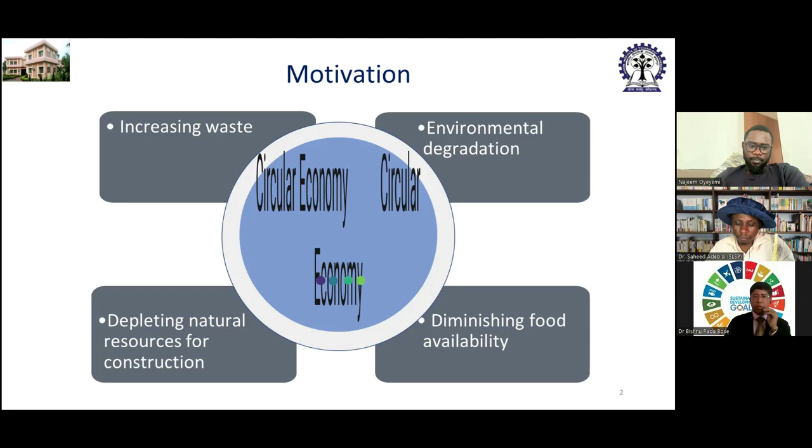This is the present scenario: carrying capacity of the biosphere has overshot by a huge margin. That means nature has lost its regenerative capacity. This is the theoretical graph - it is a tremendous critical situation for us. So recycling can reduce waste and replenish resources, thereby reducing burden on nature and increasing sustainability.

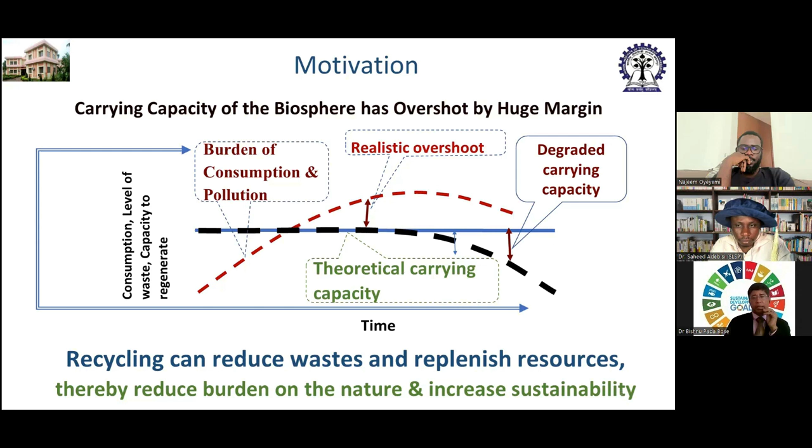These are four thoughts I had in my process: sand is a natural resource that's already depleted. Clay used for fired clay brick is not environment friendly, and it's also an illegal process because it reduces agriculture capacity, crop capacity, and land area. At the same time, stone chips also have scarcity, and available land for cultivation is shrinking due to the disposal of waste.

So these are the four elements I considered in the concept generation process. Sand mining has been restricted in India and other countries. Use of natural clay for fired clay brick is also being banned. Stone chip quarries are precariously exhausting. Land for productive use is reducing.

This is the future projection showing the rate of generation of waste - exponential growth of waste generation, which is very harmful for the earth. The solution is needed immediately.

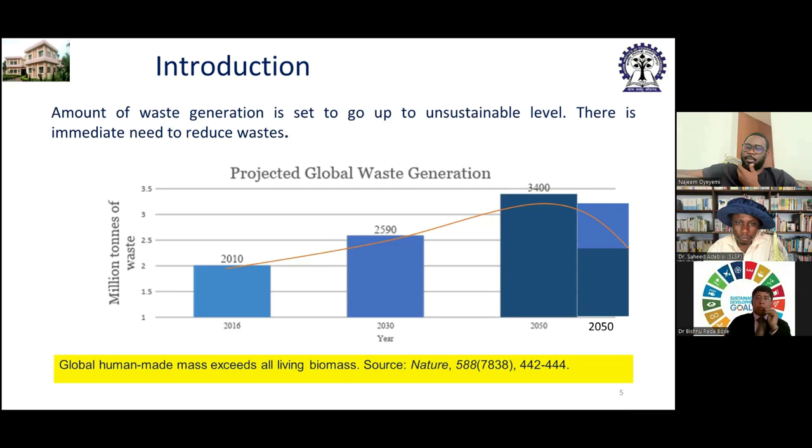My process was actually involved with mining waste. Globally, 31 billion tons of waste is generated annually from coal mines. Coal mining alone degrades 34,500 hectares of land every year. So this is a huge loss for all of us, and it's reducing the sustainability of natural resources.

The concept is that generation of a colossal amount of dangerous waste is an inherent part of mining activity. Mining activity is presently not so sustainable. At the same time, natural sources of construction material are fast depleting. Clay bricks deplete fertile topsoil, challenging food security, and are being banned across the world. Construction work is not sustainable unless an alternative source is found.

Waste contains heavy metals that pollute land, soil, water, etc., and it is unsuitable for humans also. Using waste to replace natural materials for construction work can sustain these two activities - this is the core concept.

Global man-made mass exceeded all living biomass, a landmark reached in 2020. It is pertinent to aim for a world without trash. The vision for a circular economy, where we use resources sparingly and recycle endlessly, is inspiring business and environmentalists alike.

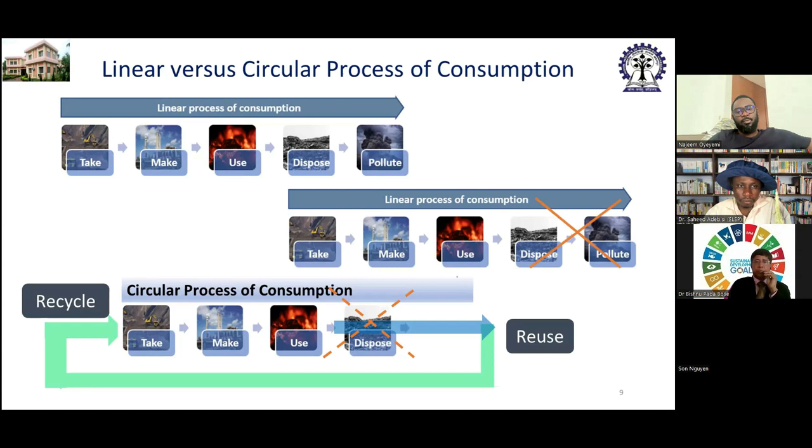Since my project is related to bricks and concrete, I have presented some negative impacts of burnt clay brick, because my production is not burnt in my brick processing - we are not using any fuel or fossil fuel. So that's what I mentioned: negative impact of the burnt clay brick, which exists in many countries.

Kilns of burnt clay bricks releases over 1070 million tons of carbon dioxide emissions into the atmosphere every year, which is 2.7% of total emissions. Globally, brick kilns burn 375,000,000 tons of coal per year.

Process of burnt clay bricks are heated up to a maturing temperature between 900 to 1200 degrees Celsius. In this process, pollutants released are particulate matter as well as greenhouse gases.

The process of burnt clay brick releases 0.41 kg of carbon dioxide per brick. There is a huge amount of carbon dioxide generated every day throughout the globe. Manufacturing of clay bricks causes substantial amounts of emissions.

Use of waste industrial byproducts in cementitious bricks can reduce the release of greenhouse gases and embodied energy of the brickworks. Bricks from waste material without a heating process can reduce a massive amount of greenhouse gases.

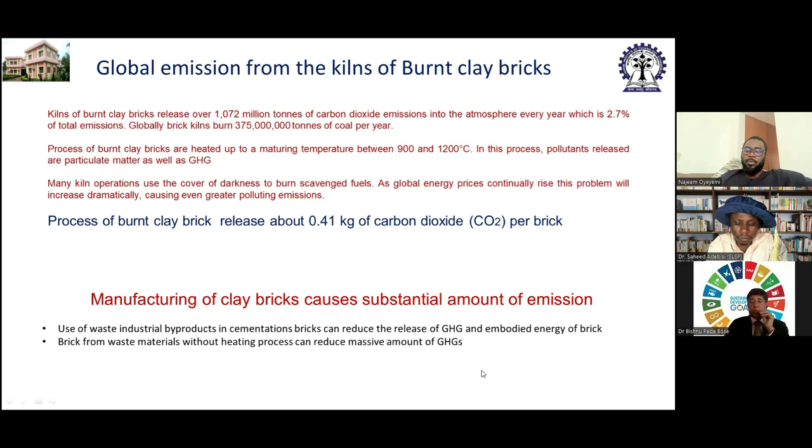Basis for selection of specific waste. This is the concept and thought behind why I selected mining waste: to identify solid waste material that is environmentally harmful, available in large quantities, can be recycled in civil engineering applications, can potentially replace depleting natural construction material, and whose disposal requires a lot of land area.

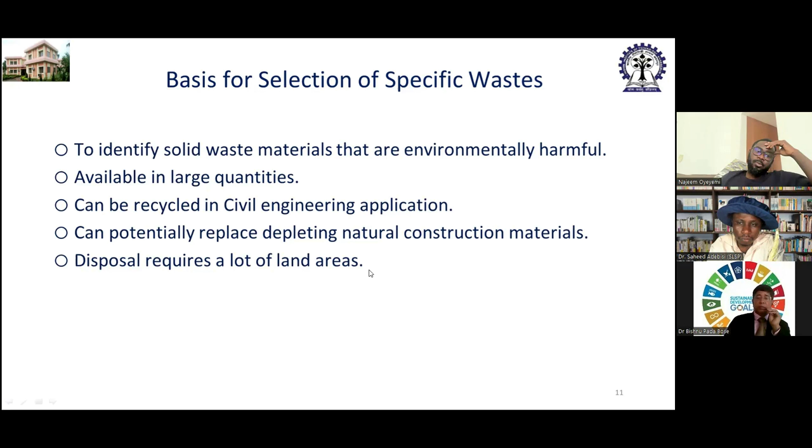On this basis, I selected mining waste because it satisfies all these conditions: mining waste pollutes the environment, is available in large quantities in the country, can be recycled in civil engineering applications, can potentially replace natural construction material, and disposal requires a lot of land area. This is how mining waste pollutes our environment, damaging biodiversity and causing calamities.

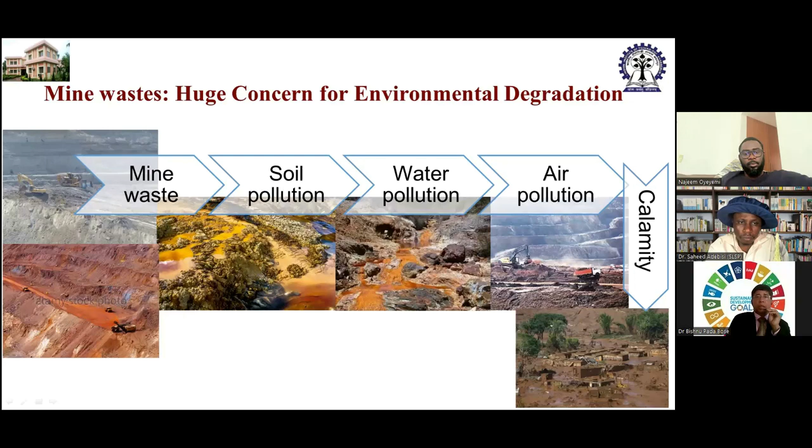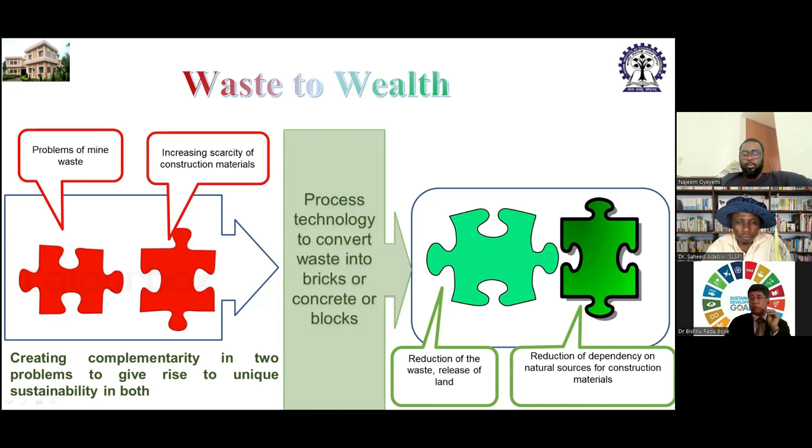Process technology to convert waste into brick, concrete, or blocks. Now it is the product: reduction of waste, release of land, reduction of dependency on natural resources and natural sources of construction material. In view of the above, I aim to develop process technology to utilize waste material as much as possible.

This is the mining waste which I considered to develop this material. It is the actual image of mining waste. This is the overburden material, which I showed in the graphical representation — 20 to 30 meters of overburden material that is actually mining waste, and below that the coal seam is there.

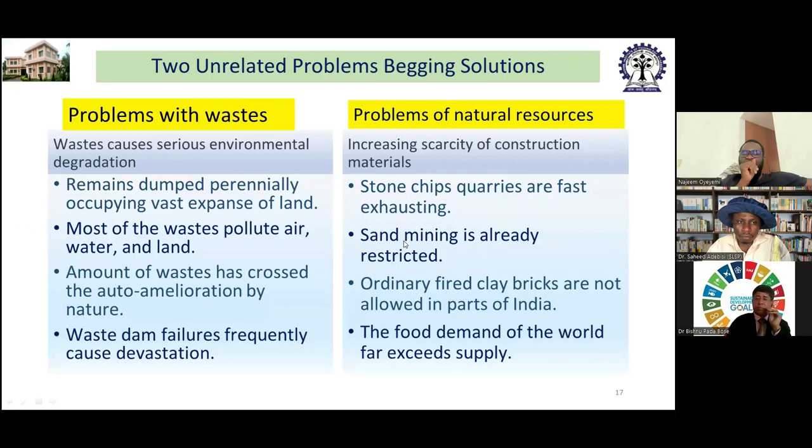Problem with waste, problem of natural resources: waste causes serious environmental degradation and increasing scarcity of construction material. This is the same thing I explained in the last slide — a multidimensional problem requiring a single solution for all problems. There is a multidimensional problem existing in mining waste, so I developed this technology which can eliminate all these problems.

Mining waste occupies a huge land area, and using all this material means naturally fertile topsoil isn't needed, unlike for burnt clay bricks. In my process, there is no heating process, no fertile topsoil required — it is actually waste material. I considered these things in my concept and finally developed this.

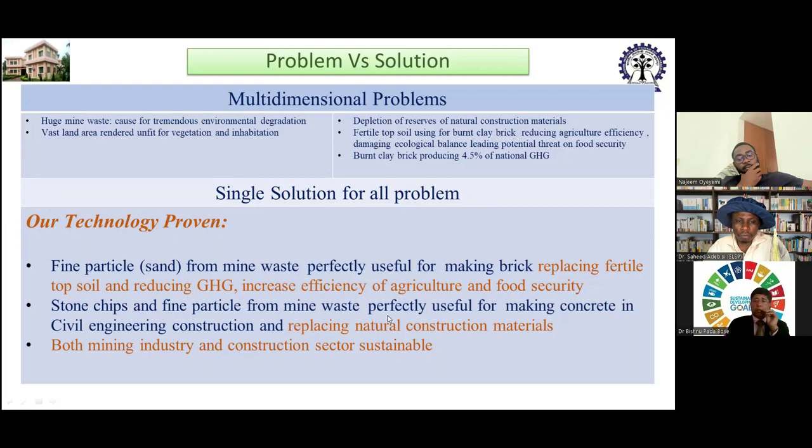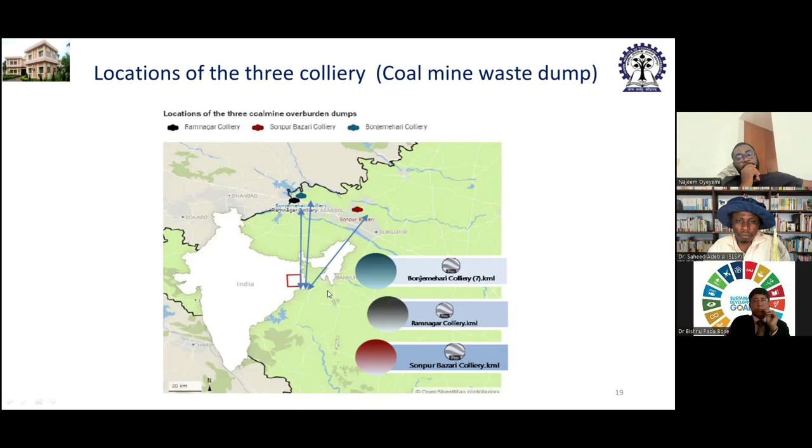This is the original location where the problem existed in the mining waste, shown with actual Google Maps imagery. This is the waste, a huge amount of waste. This is the original picture of the mining waste, with stone and rocky material available there.

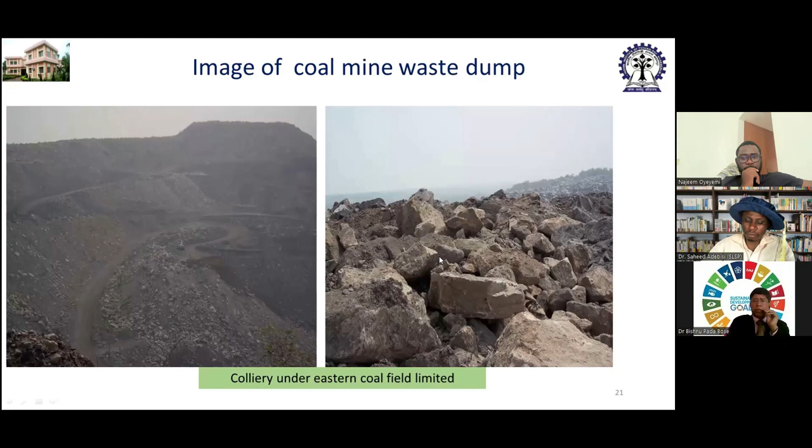Coal mine waste releases heavy metal leachate, causing serious damage to the ecosystem. Maintenance of the dump is costly, and failure can cause facility damage. Rainwater washes the waste to far away land, rendering it unfertile.

This is the circular economy concept I developed in my process: first screening the material, then concrete and brick mortar, then construction, then new life of the waste materials, then end of the buildings, then demolition of waste, and again the process. This is the circular economy concept.

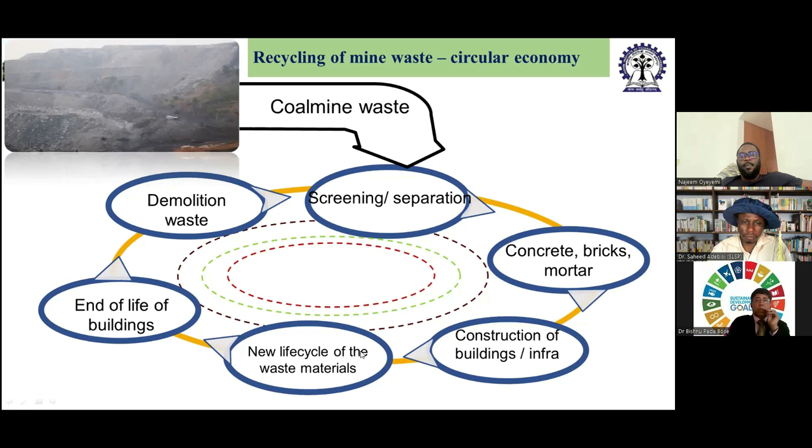Core driver of the project: to develop a process that is environmentally friendly, that can lead to consumption of bulk waste materials, partially replenish the precariously depleting natural materials, and release land for agriculture and economic activities. Benefits from the project include reducing dependency on fossil fuel, reducing emissions, replenishing natural resources, increasing land area, reducing pollution, material circulation, reducing maintenance cost of the waste dump, economic development, social development, and job creation.

This is the flow chart. First, the problem: mine spoil causes serious environmental problems. Problem two: conventional sources of aggregate are depleting — state of the art. Then I developed the concept.

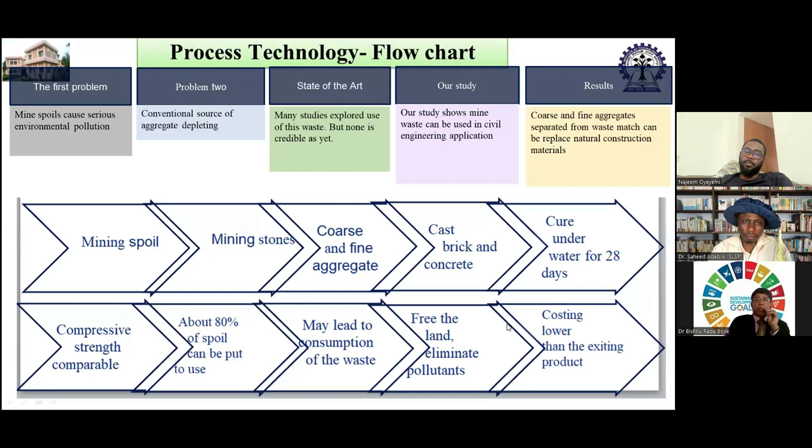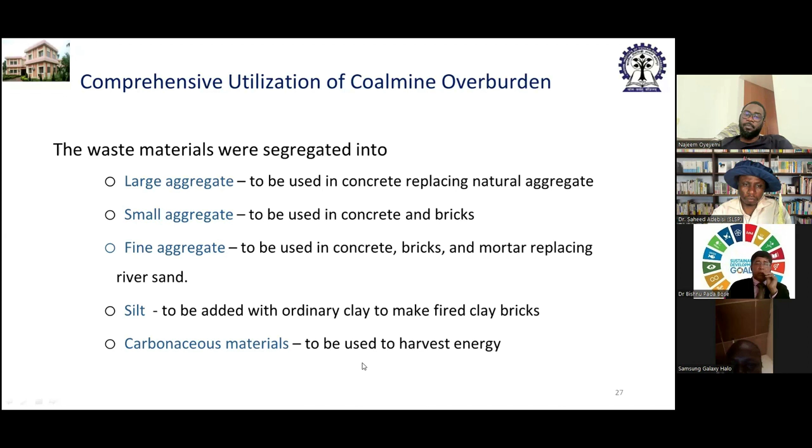Comprehensive utilization of coal mine overburden. The waste material is segregated into large aggregate, small aggregate, fine aggregate, silt, and carbonaceous material that I have extracted from the mining waste.

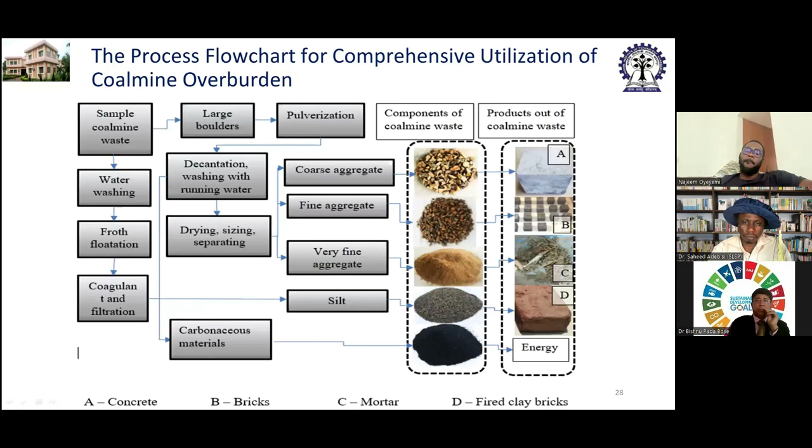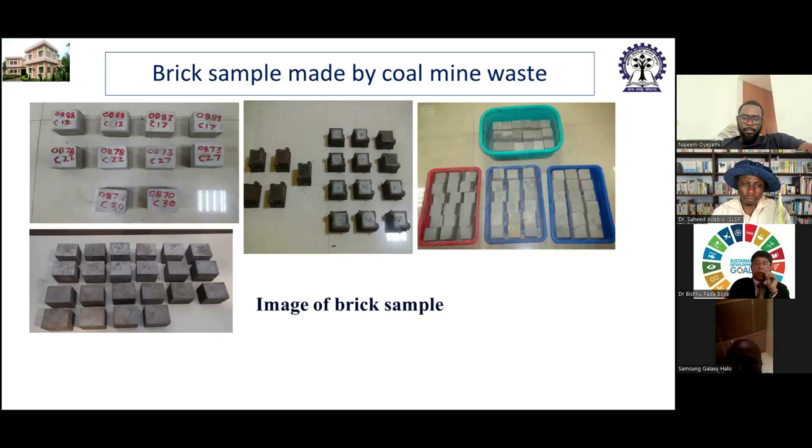These are the actual pictures showing the process in the laboratory. This is the product, a prototype developed in the in-house laboratory, and it has been tested through different mechanical and engineering properties.

This is the product and testing of the product. This is the result of the product, the engineering and mechanical analysis of the bricks, related to strength and water absorption.

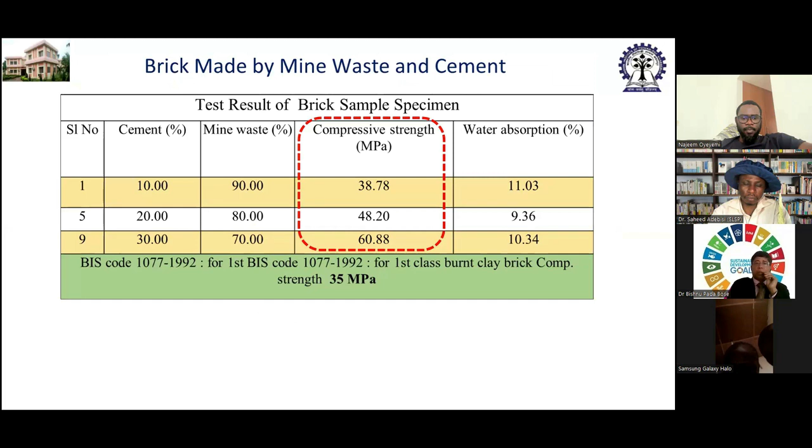This is also the result from the concrete. I have developed concrete also from this mining waste. This is the grading of concrete and the strength we have achieved, and it also satisfies the Indian standard code and all other standard codes of civil engineering. So the product is similar to conventional materials, conventional bricks and conventional concrete.

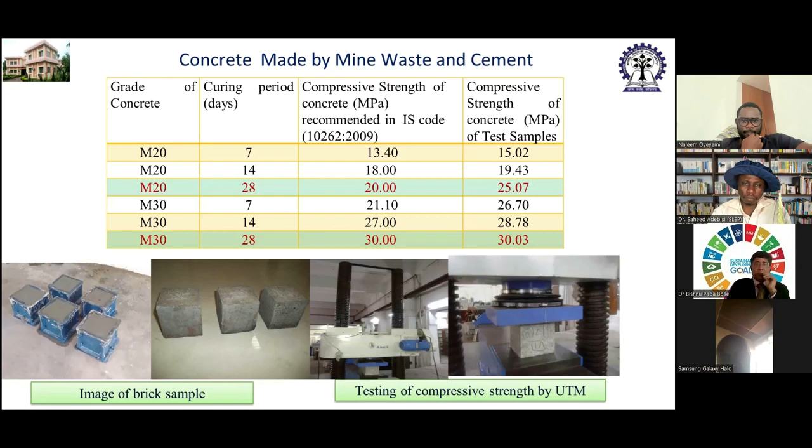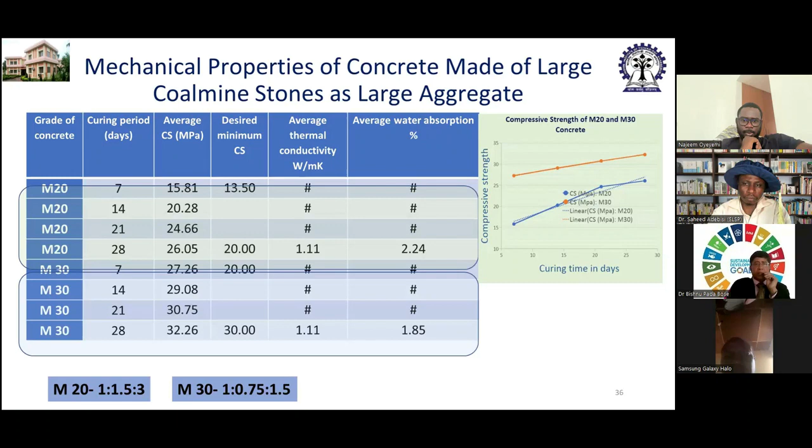These are also testing results, technical analysis and engineering properties analysis. This is also another testing, called flexural testing of the concrete, and we found that the results are very good, satisfying the Indian standard code, British standard code, and American standard code.

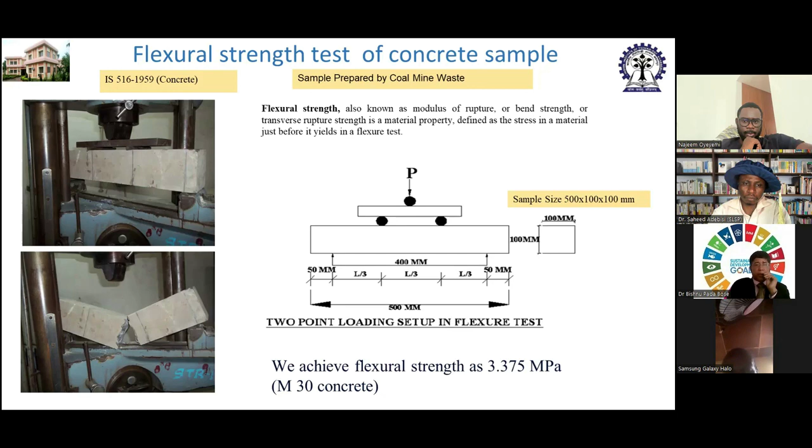This is also a results analysis. This is a brief of the results from the different analyses.

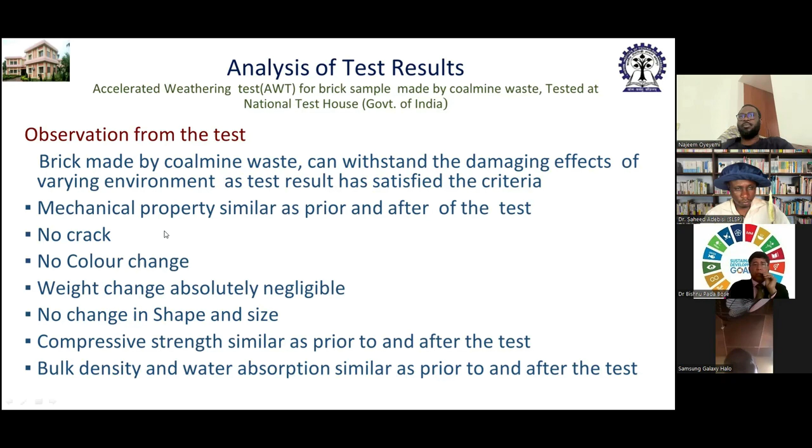This is a comparison of the product with the Indian standard code. All engineering and mechanical properties satisfy the code, so our test results are very good, as good as traditional construction materials, traditional concrete and traditional bricks, as mentioned in the Indian standard code.

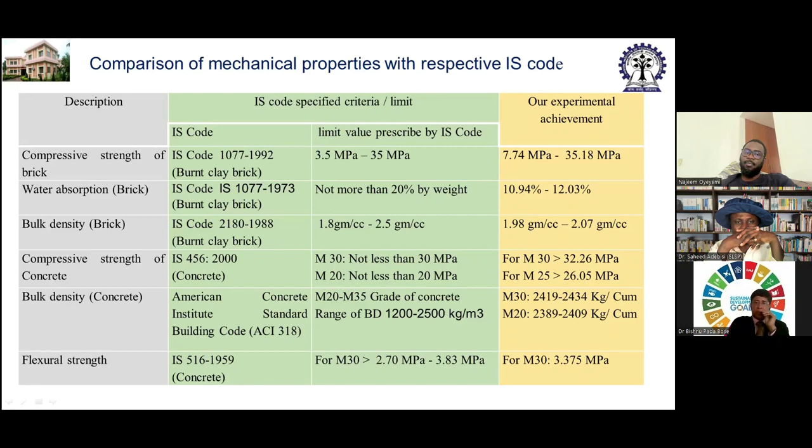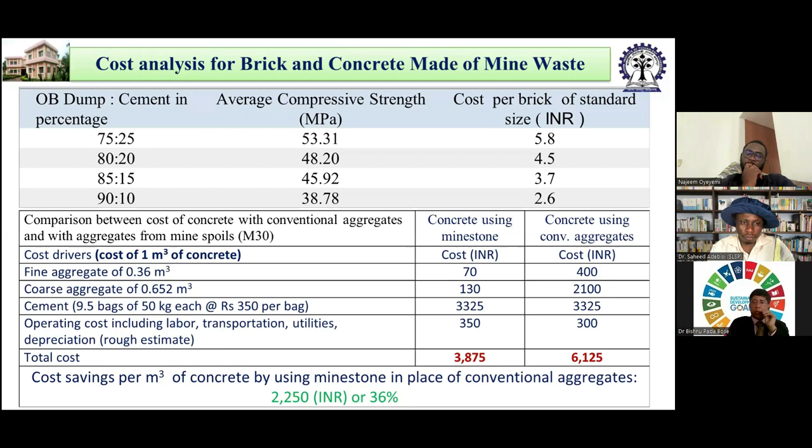Costing is also 36% less than traditional conventional concrete, so that is the cost estimate we have examined here, along with a comparison of the brick rate with bricks available in the market.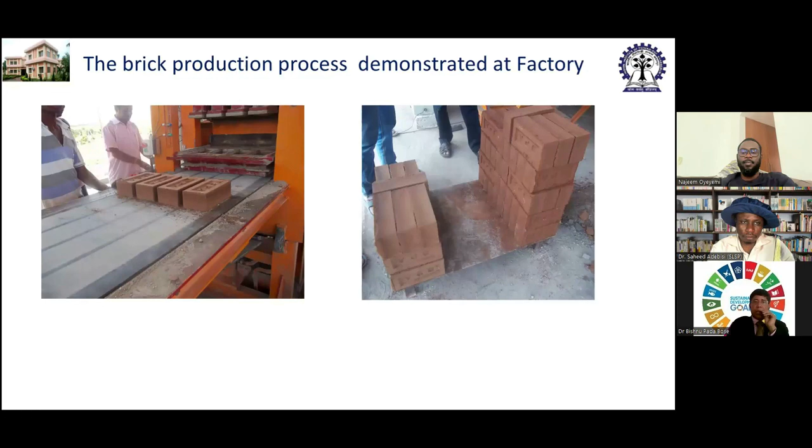This is the product at a factory level, and this is the demonstrated process at the factory.

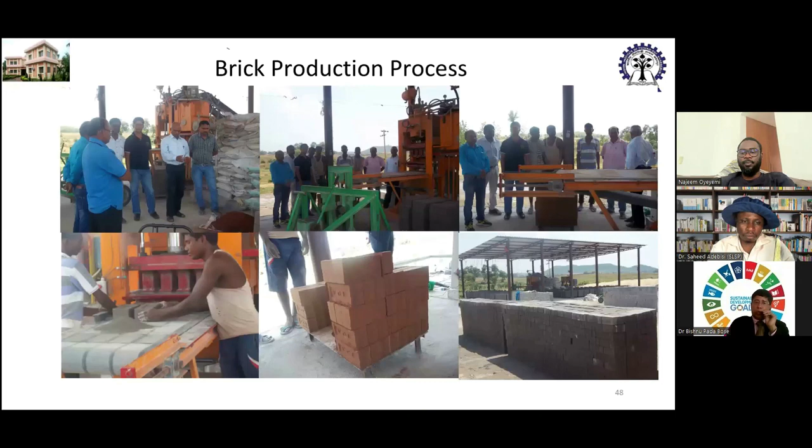So the novelty of our work is waste to wealth, mainly low carbon footprint, because burned clay brick needs a huge amount of fossil fuel and produces emissions, whereas our technology, processing bricks by cold process, requires no heating or sintering, eliminating greenhouse gases. It is low cost, has high compressive strength, and a scalable business model.

Buildings constructed using this waste material are classified as green. This releases a vast area of land for agriculture and commercial activities, creates job opportunities for local and displaced people, and replenishes scarce resources for aggregates.

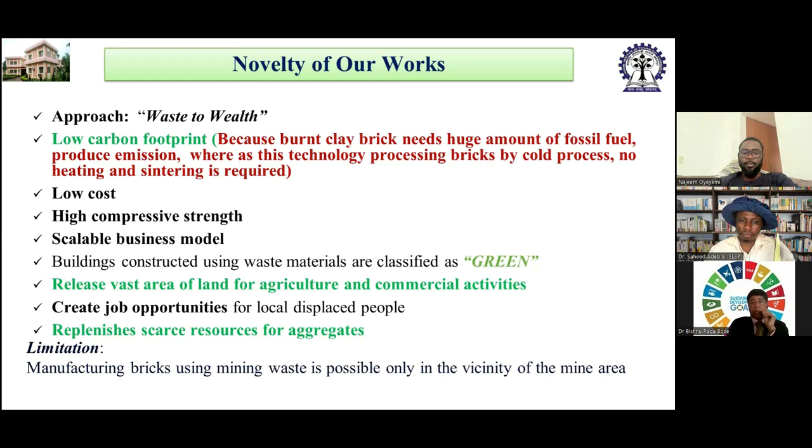But there is one limitation: manufacturing brick using mining waste is possible only in the vicinity of the mine area. It is better if the factory is established near the mining waste.

Conclusions: the process developed can lead to comprehensive consumption of coal mine overburden waste. All the products meet their respective Indian standard codes. The cost of the bricks is lower compared to comparable standard bricks. Entrepreneurs are interested in these technologies, and a lot of waste can potentially be recycled and put to use.

Some part of the natural resources will be supplemented, and a lot of land area will be released. Adoption of the process would lead to converting waste into wealth, and implementation of the technology would squarely fulfill the circular economy philosophy.

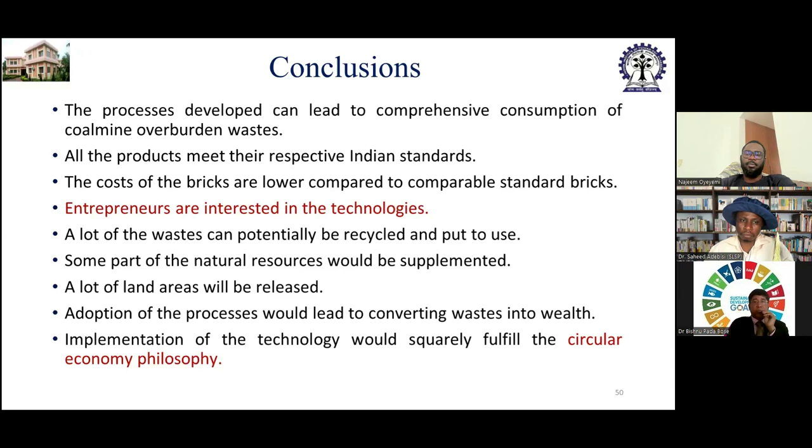It is possible to convert mining waste into construction material without compromising quality and cost, a sustainable proposition. The technology can help consume waste and provide an alternative resource for the construction sector, and the calamities associated with the waste will cease to exist.

The technology will ensure food security by replacing traditional clay bricks, because traditional clay brick production consumes a huge amount of fertile topsoil. Buildings constructed using this technology will qualify as green buildings, and the technology provides innovative entrepreneurial opportunities with unique social perspectives.

As one dialogue goes, the circular economy is not just planet friendly, it is a $1 trillion market opportunity, because the whole world currently has only 9% circularity, so 91% of the opportunity is still unfolding.

Thank you so much. Actually, it is a huge amount of concept, there's so many slides. I have shown only part of it, and there are 3-4 more parts as well.

Thank you so much, Professor Bishnu. When I first received this presentation, I was so amazed, and still now, mentioning these are just parts extraction of the work. If you've been working on this solution for years and tested it, even scaled it up to market adoption by the government in India and other industries, I think it is open to the world. This is fantastic and worthy, something everybody must celebrate.

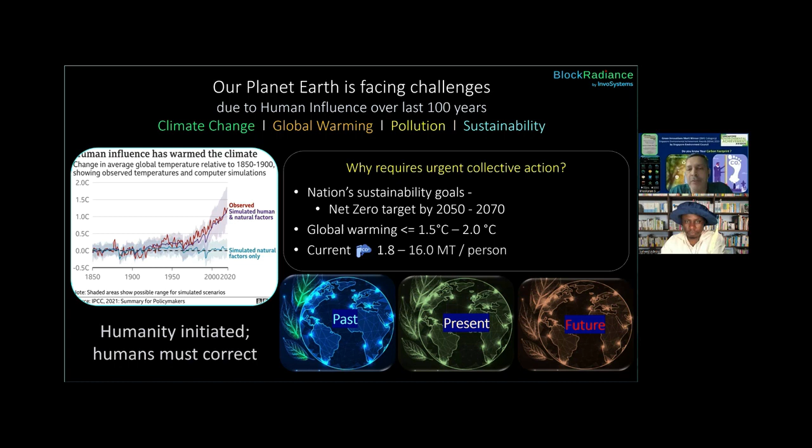I will not go through all those what's in the slide. So today's topic is taking responsibility and making a meaningful impact on the community and society at large. How can we do this? We should develop a sustainability consciousness. Today, nobody has got a consciousness focusing on sustainability.

Businesses alone cannot fully solve the environmental challenges. We should collaborate with educational institutions, businesses, NGOs, and government. We should collectively participate and take actions to create awareness and green literacy. There should also be active engagement from stakeholders, be it student, employee, or community.

With this view, we created 3 mobile apps. One for empowerment, where it will empower an individual to manage self, finance, sustainability, family tree, employment, student life, documents, and all those things. The second app we created was called Planet Sustain, where any individual, government, business, or SME

or student can track and manage their carbon footprint. The third app is called Preventive Health, or Invo Health Plus, where an individual can store all the health data and documentation, then share it with the doctor when it's required. All 3 apps will work without internet and Wi-Fi.

All life forms, except for humanity, practice sustainability and responsible consumption, and this is the root cause for global warming and climate change. Sustainability has got very few takers - they're not bothered or aware of it because there's a lack of awareness, lack of a follow-up mechanism.

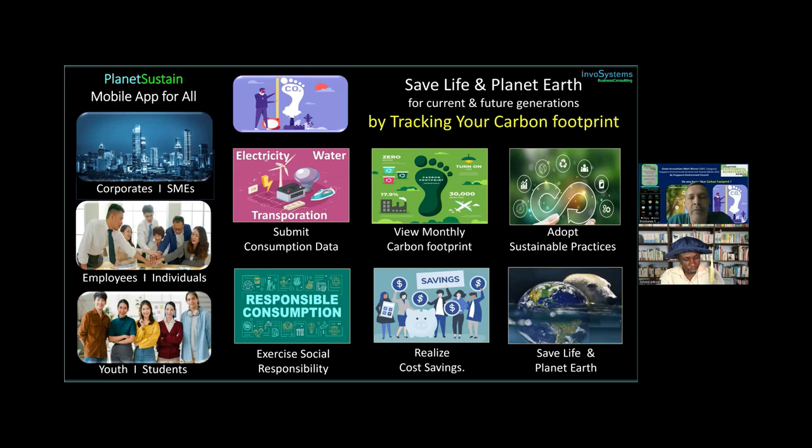Let's say I want to understand, by consuming electricity because I'm using electricity at home, what will be my carbon emission. All I have to do is click on electricity. You will have the energy sources - is it from solar energy, electric supply? In Singapore, because our electric supply is from natural gas, we'll have one more element like that. Let's say the common electric supply is from the state government or central government - I just click on electric supply or solar energy.

You will see the unit of measurement, kilowatt hour, and what is the carbon emission factor per kilowatt hour. In Singapore, we use 0.4057. All you have to do is select a month and then enter the unit, how much you consume. So you select the month and then you enter the unit. You'll know what is the carbon emission for consuming, let's say, 250 kilowatt hours. The carbon emission is 101 kg CO2e.

And then you can look at month on month what the consumption is. The data entry and viewing the data is similar when you take transport - let's say you're driving a car using petrol or diesel, or taking public transport like train or bus, or you consume water, paper, recycled materials, plastic bags and PET bottles, travel, smoking. The data entry and viewing is the same.

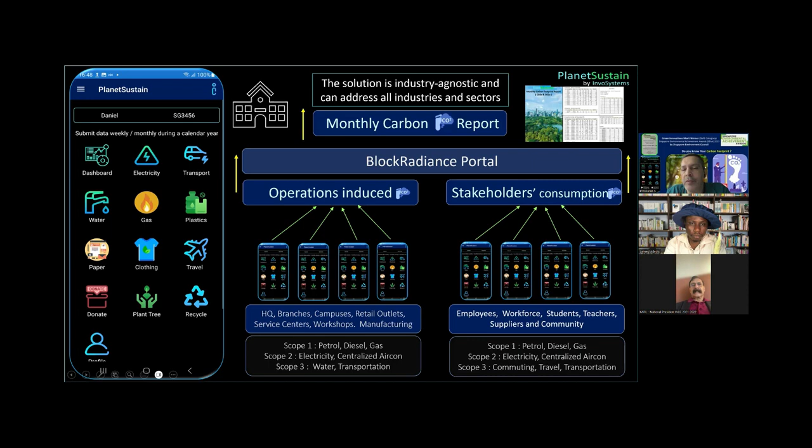This can be used, and we can also launch pilot programs for schools and colleges to engage students to create awareness. We can also work with SMEs, corporates, and businesses. We can engage stakeholders and work on scope 3 collections, collecting data from the supply chain or from suppliers.

So the end use is for school students, NGOs, volunteers, government, business employees, federation members, users and community. As part of services, we provide green literacy and create awareness. Thank you, that's my time, 10 minutes. Thank you.

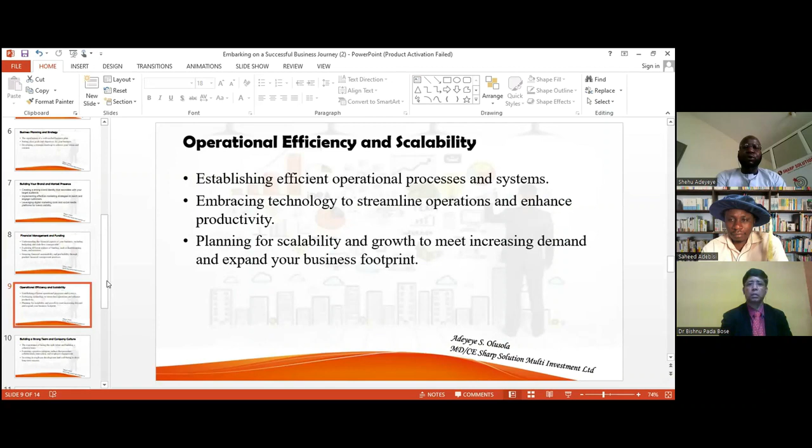Business, building a strong team and company culture. Every startup starts from one person's idea. There's a difference between a startup and a company. When I first started Sharp Solution, I was all alone with my idea. I was the founder, the manager, the financial director, the driver, the secretary, the everything when I first started. So when there's not much money to count as a startup, you are the financial manager of your resources. So when your finances get bigger, then you will need the help of an accountant to help you out with some of the finance work. Where you need to visit more places, you can now engage a driver.

When the demand for your quality service goes beyond your location, then you need to expand your branch. So when I started all alone in Abuja before people recognized what we were doing, more professionals were coming on board. So when you are growing, you grow gradually, but make sure you are building a strong team and a company culture. You cannot have everybody on board when you are starting, but as you go, make sure the team you are building is strong, and you invest in training yourself, then you invest in their training too and their well-being. That's the essence of entrepreneurship. You cannot have it alone, you cannot eat it alone. You need to collaborate with people, you need to join hands with other professionals to drive your goal.

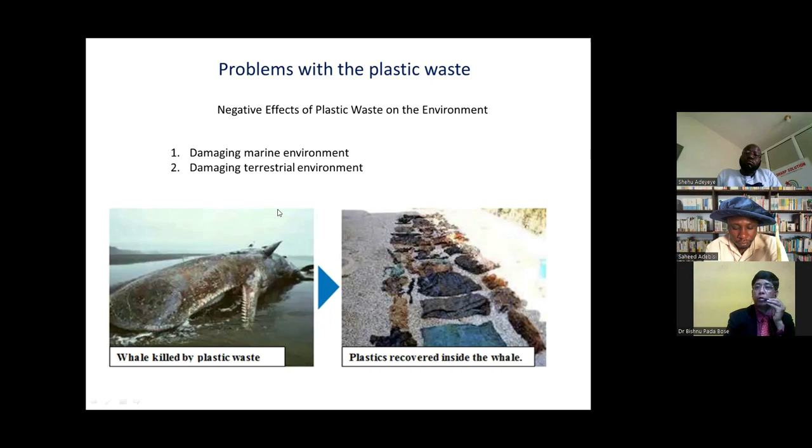A solution to mitigate the issues of plastic waste. This is my case - I have developed a process technology to use plastic waste thermoplastic for processing bricks that are lightweight, porous, and have high thermal resistance.

Plastic embedded in bricks is not ordinarily likely to release harmful chemicals, for two reasons. First, favorable conditions for such release may not be achieved in the context of a building. Second, the plastic remains embedded inside the wall, which may be further covered with plaster, keeping the chemical safe inside the wall. So it is relevant to use plastic waste in building materials.

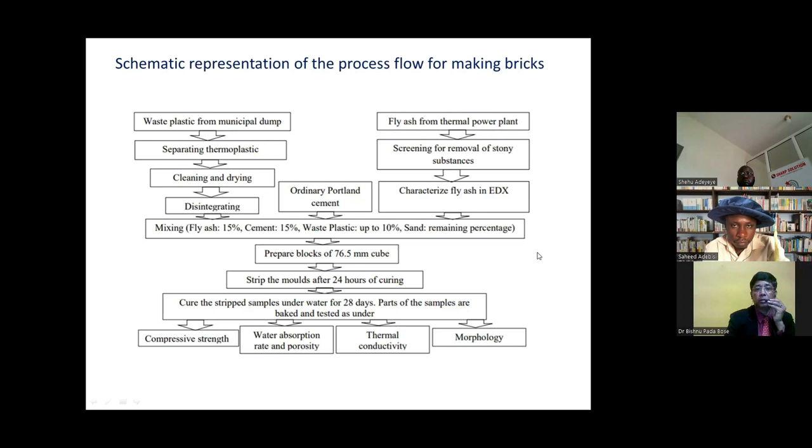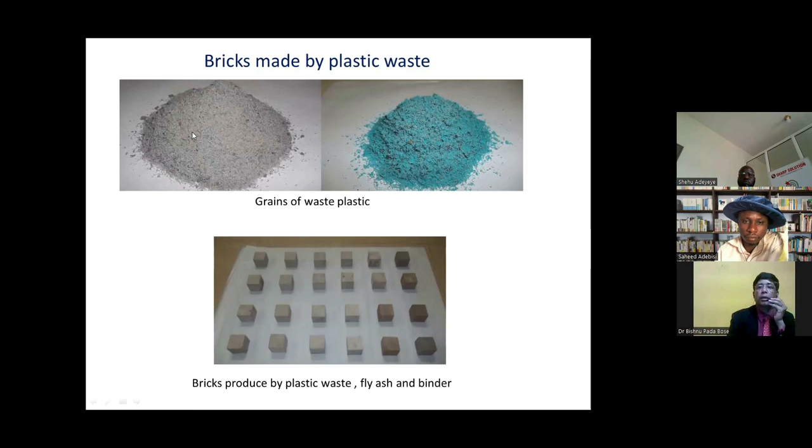Prof, Yes, sir? yes. So we are going to rejoin Yes. back. Yeah, we are going to rejoin Yes, yes. back. We are going to rejoin back.

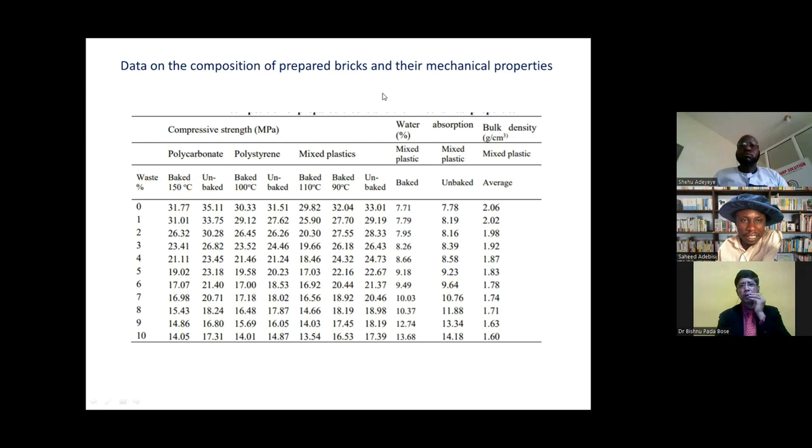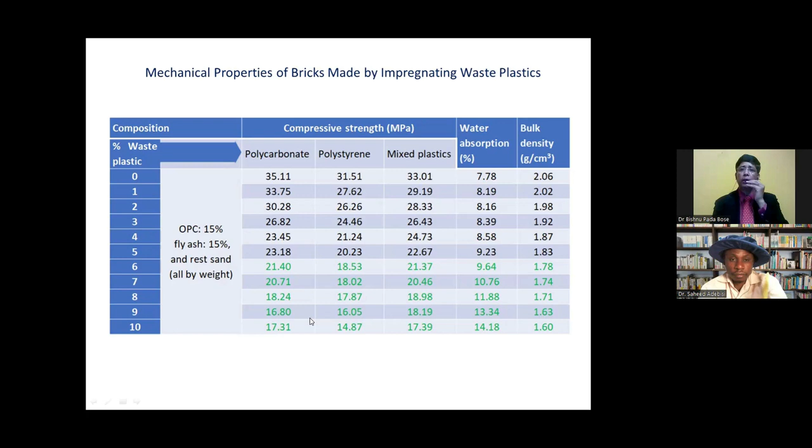During the experiment phase, I tested different batches of prototypes or models, and accordingly we developed this technology.

This is one of the experiment data sets, showing how the material is baked at 150 degrees Celsius, 100 degrees Celsius, 110 degrees Celsius, 90 degrees Celsius, and we observed the mechanical and engineering properties.

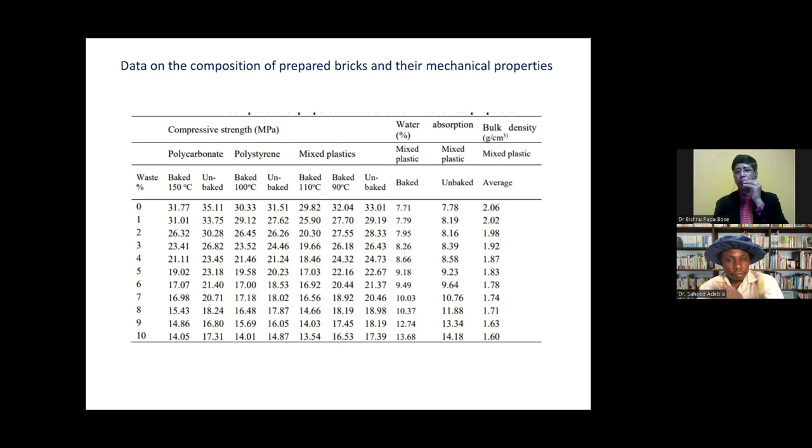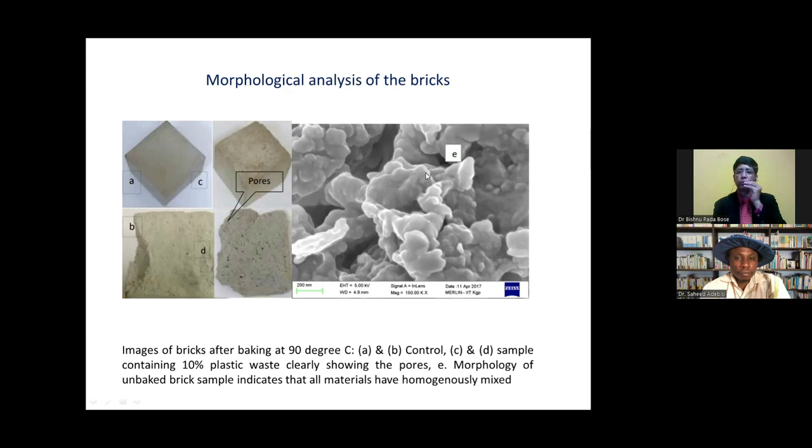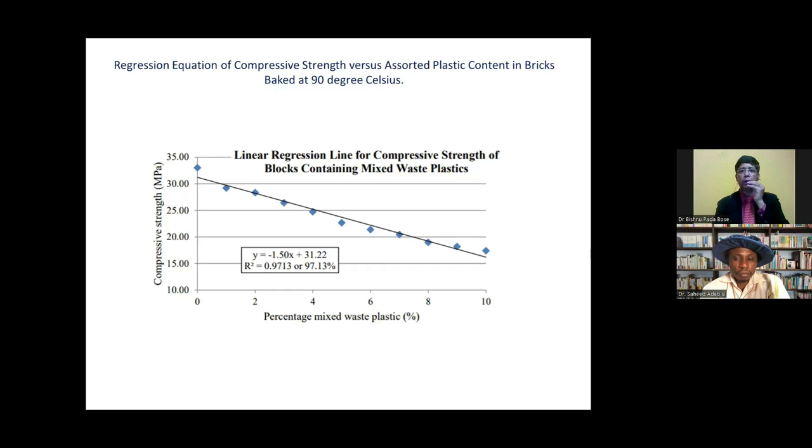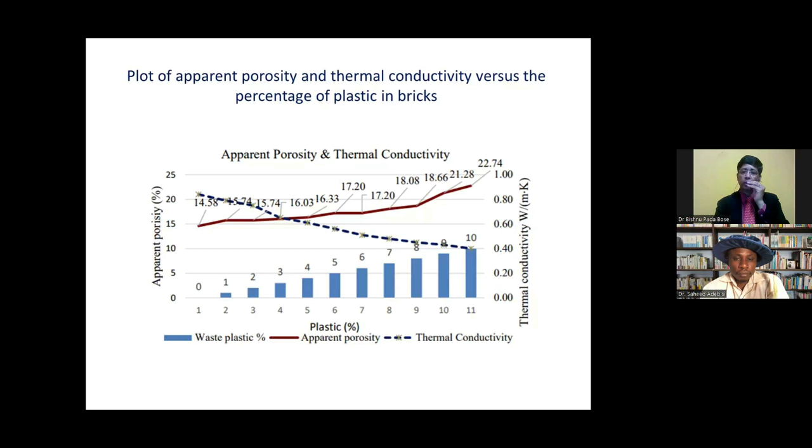This is apparent porosity and thermal conductivity, examined for different batches of samples. Percentage of plastic waste versus thermal conductivity is also something we examined.

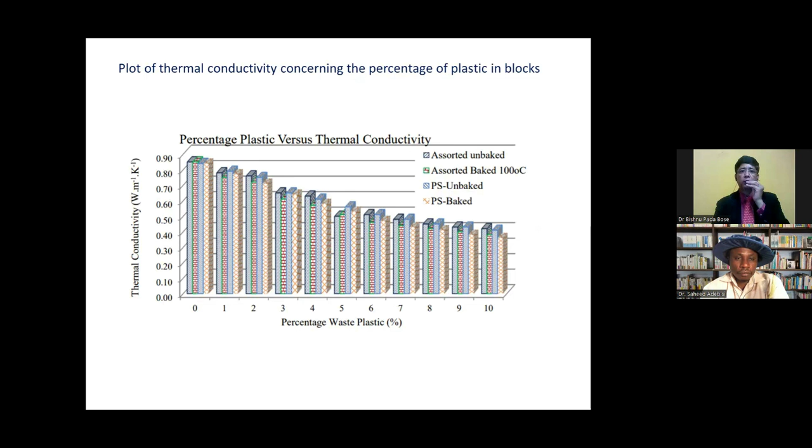Accordingly, we can decide where this material can be suitable to use.

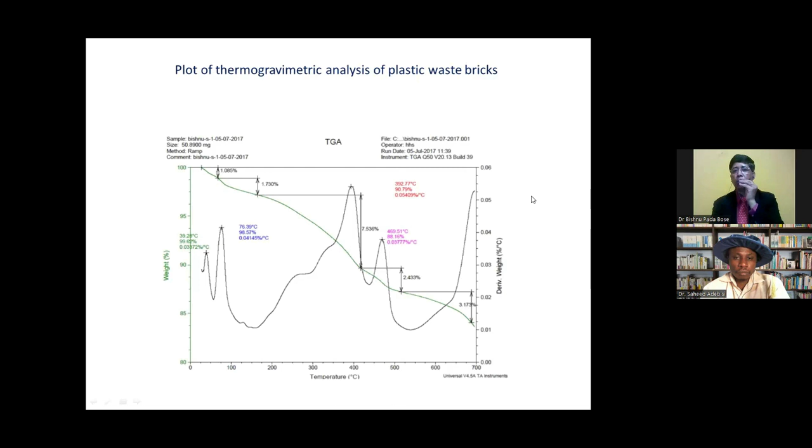Key benefits from this project: reduce pollution - I mean plastic pollution, because plastic pollution is a huge, significant issue throughout the globe. Reduce greenhouse gas emissions, recycling opportunities, circular economy model where we can continuously recycle the materials, economic value, reduce cost of maintenance of the plastic waste dump, entrepreneurial opportunities, scalable business model, mitigating global warming and climate change, and improving global sustainable development.

So finally, this is the conclusion. The waste plastic impregnated bricks have high thermal resistance, a feature that may add economic value to brick manufacturers, motivating them to establish the necessary logistics for the collection and use of all types of waste thermoplastics. Additionally, this project also presents a model to predict the compressive strength of a brick at varying plastic contents.

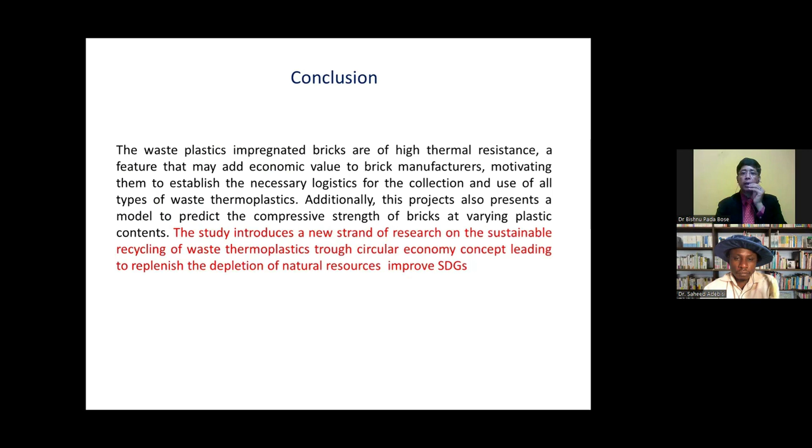The study introduces a new strand of research on the sustainable recycling of waste thermoplastic through the circular economy concept, leading to replenishing the depletion of natural resources and improving sustainable development at the global scale. Thank you so much - this is my presentation. I developed a construction material by using plastic waste.

Wow, thank you so much. Thank you so much, Professor Bishnu. And I think this is another dimension to the waste to wealth and job opportunities from research that you have also done and tested.

My question, I have been trying to probe, like I asked Sir Kapil as well, if this very innovation is to be transferred or replicated in other countries like in Africa, what are the processes, what are the best practices that you can suggest that such a stakeholder can put forward or act upon?

Professor. Professor Bishnu? Yes, the question is for you.

Come again, the question? How can stakeholders interested in this innovation collaborate with you to localize this solution? For example, when I was walking through the distance yesterday, I saw clusters of places where huge amounts of plastic have been collected. The majority of people are actually working as collectors, collecting it from around the communities and dropping it at those designated sites. I could imagine every time I would see heaps of plastics, even on my own university campus. There is a particular hall that students use regularly, and every day they must pack loads of heaps of this plastic out. I wonder where they are taking them to. I believe if this kind of innovation is available, and a stakeholder wants to invest in it, how would they go about it?